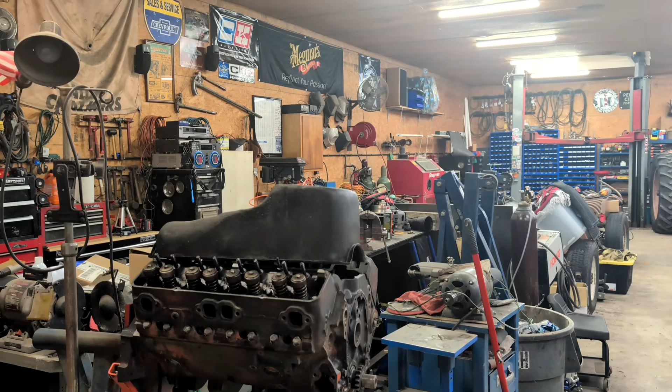Okay, so here we go. So I told you guys in the intro what I was wanting to do was get some of this place cleaned up. I've got messes everywhere. I've been cleaning up a little bit.

I cleaned up this workbench for the second time, and I was actually trying to get some shop projects out of the way to get some stuff cleaned up, because I was wanting to get that bench top right there cleaned off. I've got a rack that I was in the middle of building.

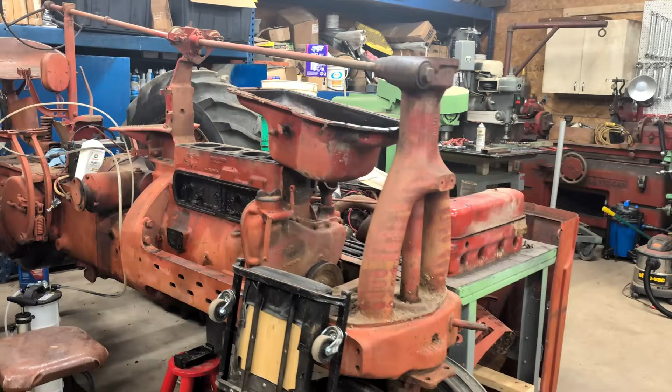But so here's what happened. I was cleaning some stuff up, and for one thing, I was wanting to get on this rat rod. But this M Farmall back here, late last spring, I decided that the engine was going to have to be rebuilt. I was wanting to do a video basically of pulling that, a pretty short video. But I'm trying to get stuff taken care of.

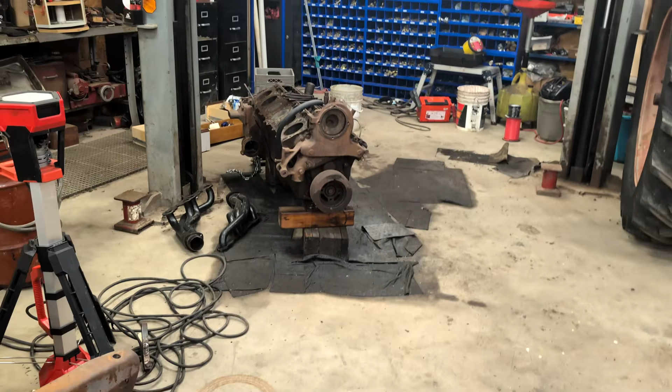But so under my lift right here, here's that one block for that V12, and this one's been partially torn down. And so I had a cart that I thought, well, I'm going to take a cart and mount this engine to it so I can just roll it around. Well, here's the one that is together.

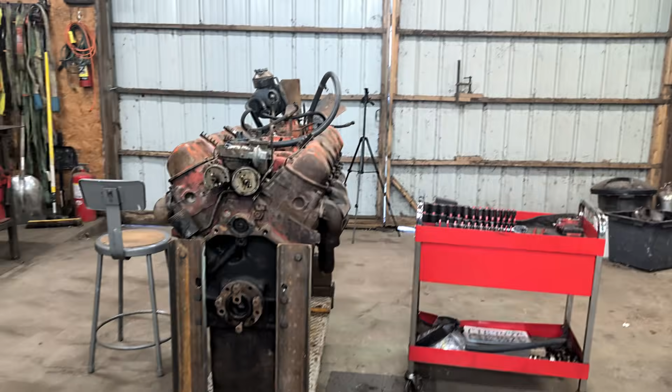But this is actually a bad block. And so I got this engine on this cart, and I seen that this thing was just so darn heavy and big. I thought, well, I better tear it partially down. Well, I just remembered I was going to do that on video. So here we go, I'm going to go ahead and tear this thing down.

Now, this is the engine that the block is no good. I think that I'm going to really try really hard, I'm going to turn this block into a cutaway, and maybe put it on a little trailer that I can take to shows.

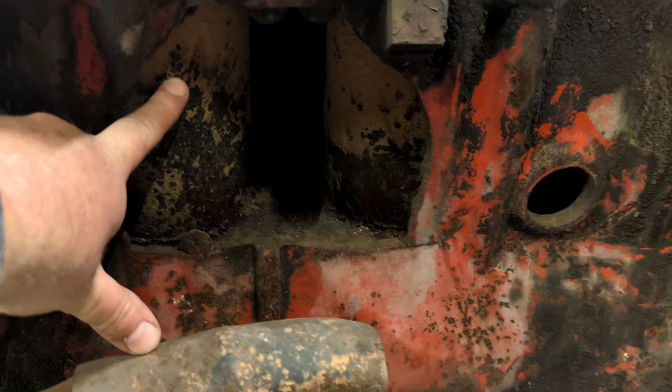Now I will show you here why this block's no good. See that big hole right there? There's the cylinders right there. And look right here, see that? That's actually the head, and I'm amazed that happened. And over here, see that crack in the head there? So I'm sure that this block was left outside with water throughout the coolant system.

And if you look right here, a freeze plug popped out of it. And then right there, there's another crack in the head. And over here, there's another crack in the head.

So with this thing being so big, I'm kind of needing to get it out of the way for right now, so I'm going to go ahead and start tearing this down. And I did want to document this. This is going to be a first for me. I have never torn down one of these V12s or an engine quite like this.

I'm not going to tell you guys a lot about the engine right now, because in this video I'm going to dig up some history and we're going to talk about this engine in depth, because there were many uses for this engine throughout the years, and I'm going to tell you how long it was made and so on. But with this walk around right now, let's go a little bit over the engine that I want to talk about.

Okay, so this is a 702 V12. And I'm going to talk more about this later, but they did call this a twin six, okay. But it is one solid casting, one solid block. It has one crank, it has one cam, but it does have four heads. See, two there and two on the other side, okay.

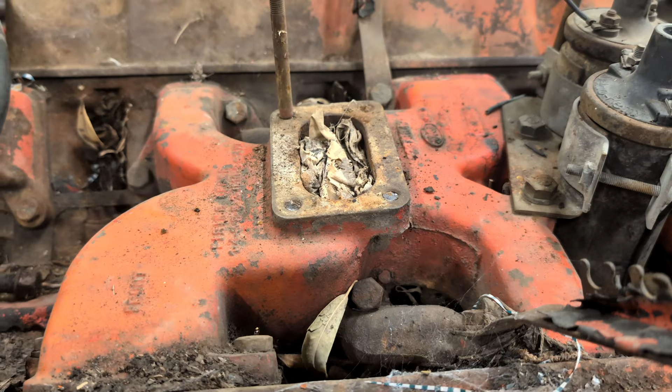It does have four manifolds. It is a V12, and it's got two separate intakes. See, there's the back intake and there's the front intake. Okay, and there's the cooling system. It does have two thermostats.

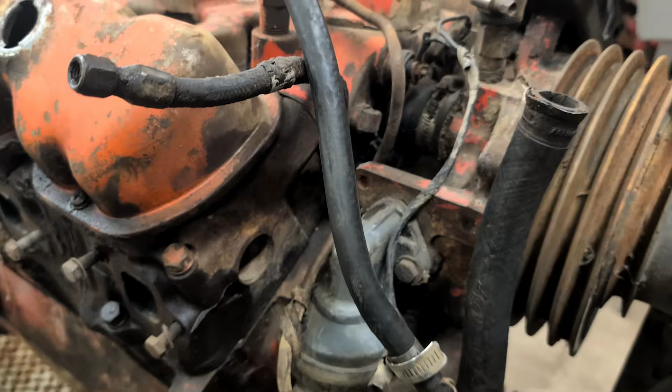Okay, there's a fuel pump, fan, pulley, water pumps behind that. See this pulley here? Now when we get that far, we are going to have to support that and pull that whole front cover off. But I think we're a ways from that.

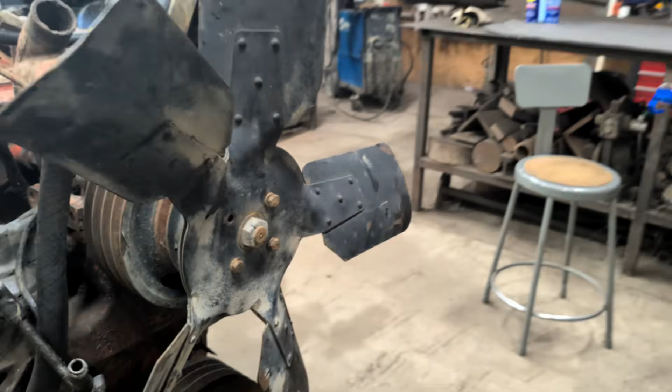And looking at this, I don't know if there is a spot for the cam in the back. But if you look back here, I don't know if you can pull the cam from that or not, but that is a drive gear for a cable-driven tach. Okay, now give me just a second and we'll go over to that other engine, because I think that other engine has a cable-driven tach on it. Okay, right there, if you see, that is actually a drive system for a cable-driven tach.

Now this engine here, this is the good block, but it's got some issues with the internals. As you can see, I think that this engine here probably ran a water pump and ran on propane. And if you look right here, see that burn hole in the top of the piston? But this is the one that's supposed to be a good block, but it's got bad internals.

So we will be tearing this one down later. I don't know if I will do this one on camera, but I am going to tear that other engine completely down on camera. If you look right there, that is the oil filter, so it's a big one. But so that's what I'm up to.

I'm going to get you guys on a stand, see if I can get you to where you can see. I may put you on time lapse in the beginning, because I'm going to take some stuff off that really doesn't matter, you know, like the valve covers and intake and stuff like that. But once I get some of that stuff off, we'll go over it and talk about it. Okay, but like I said, right there you can see it looking down in there. That is one cam, and we're going to pull it out of that other one. Okay, let's get you on the stand, we'll go over to that other engine, we'll start tearing it apart.

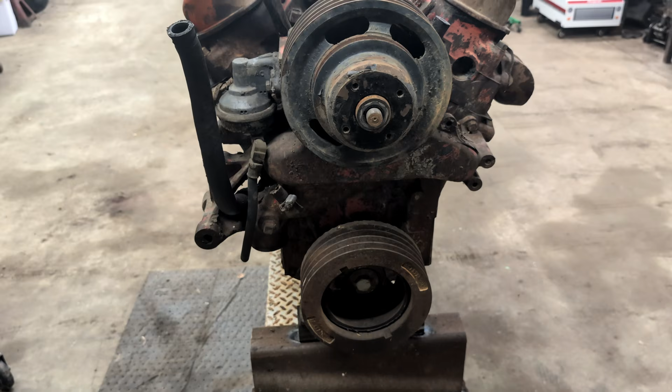And this endeavor is going to be something else. So I'm going to put you guys back on time lapse, and I'm going to take more of this apart.

So I've got the intake, distributor, valve covers off. I did take the power steering pump, fans, and such off too. So I'm going to take you over to the table before I go any further, and I'm going to show you what some of these parts look like. Then next, I'm going to start taking the heads off of this thing.

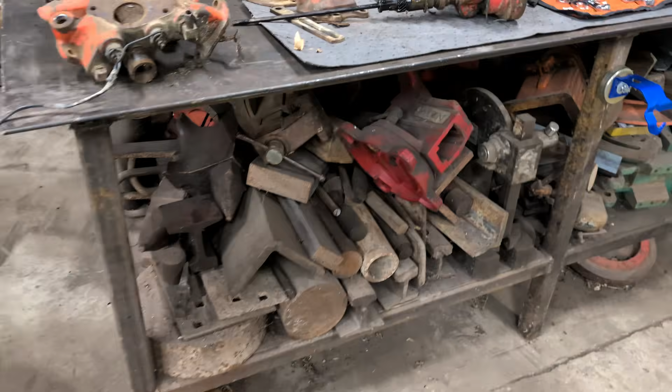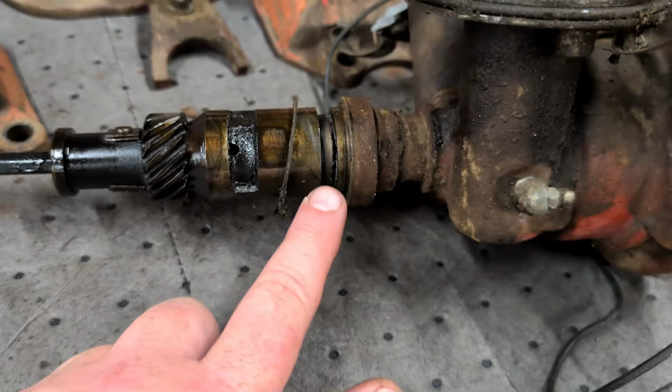Okay, so right here, that is the distributor. And I showed you earlier that it had two drives on it for the caps to put spark to your spark plug wires, and two sets of points. It's a little short, dude, but it's got a long oil drive on it. Look at that thing. After getting this distributor out, I don't think it's going to do me any good - if you look right here, it's cracked. I do have another distributor, so that'll help.

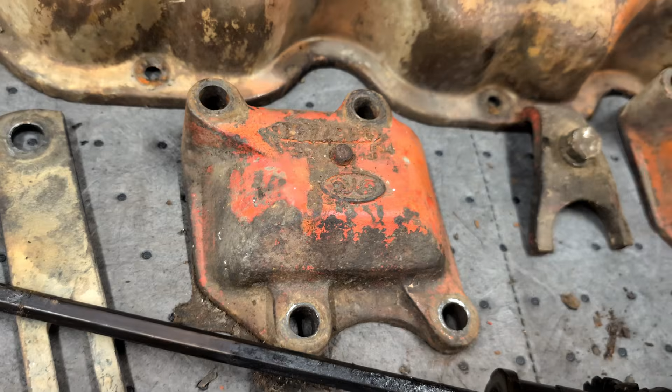Okay, these were some caps that were on the heads. I think that was to keep from having a crossover in between the two intakes. And there's a valve cover, which is not much - they look just like what's on the V6s.

Okay, here is a thermostat housing, and I thought that was a double, but it's actually a triple. Look right here, triple thermostats in this thing. And look here, here's the sensors - look at all the sensors. They got two sets of sensors. So yeah, triple thermostats.

Okay, here's one of the intakes, and they're just like what's on the V6s. And then come over here, that's upside down, but that's the exhaust manifold. Man, I tell you what, those are probably, well, they're 60 plus years old, and they are heavy, heavy, heavy duty. Look how long they've lasted. I think they're the exact same as what's on the V6s.

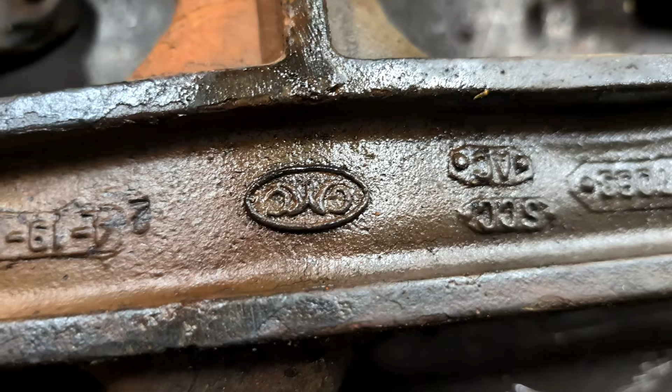But I will tell you something else - if you look right there, almost every single one of these parts has got that GMC logo on them. They were kind of proud back in the day, like Ford used to - Ford used to stamp Ford on everything. Everything I found has GMC on it. So there's another valve cover, and there's a power steering pump, and there's a fan. So that's what I've got taken off so far.

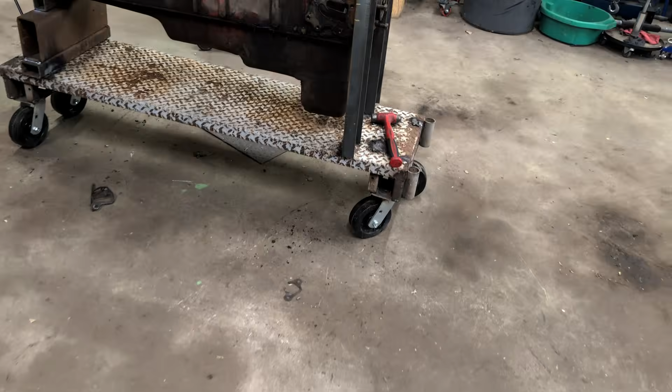I'm going to take you over here once again to show you down inside the valley. There is a cover right there, but I think I'll wait to take that off after I get the heads off.

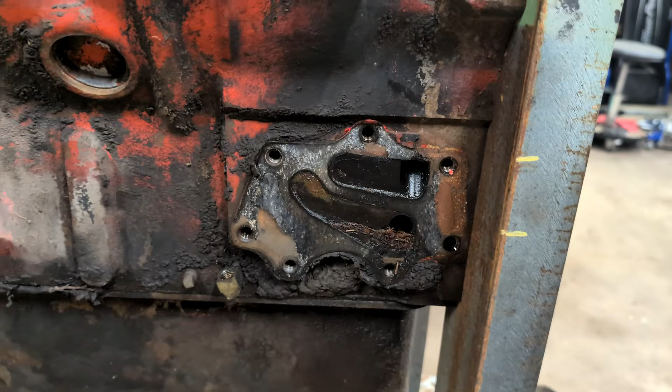Right there is where the housing goes for the oil filter, so the oil filter housing goes right there. That's what I'm going to do next - I'm going to take the heads off of this. I'll take the rocker shafts off, get the push rods out, and then take the heads off. But this setup is pretty much just like what the V6s are, pretty much the same, just an old school rocker setup.

Okay, so here in just a bit, we'll get these heads off. Okay, now, got one more right here. Two more.

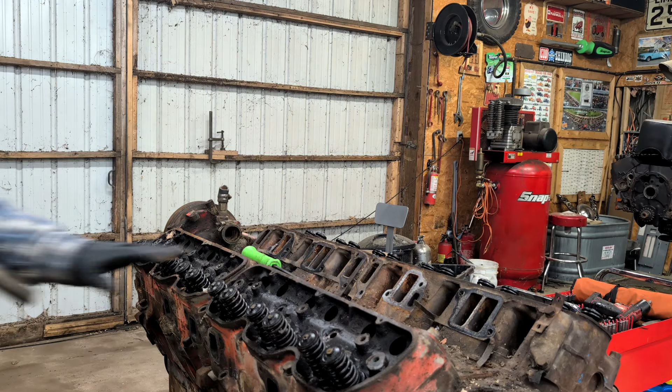All right, let's see what we got here. Let's see, got here, there. Got all on the inside, all there. All right, we should be good to go. Let's see what happens here. Oop, that one's gonna come off pretty easy, I think. Oh, these are heavy. Okay, there we go.

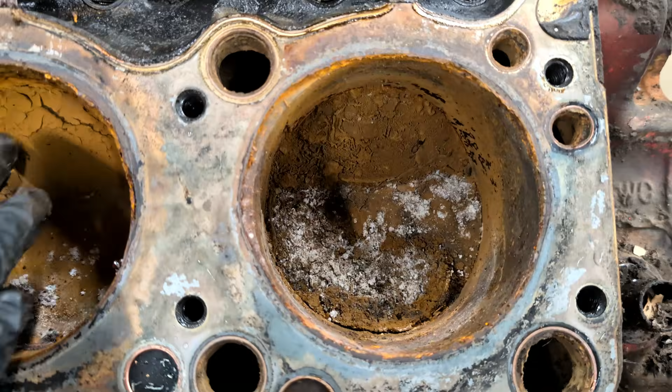Woo-wee! Look in there. All right, I'm gonna have to stop you guys for a minute so you guys can see this. Get you off the stand. Hang on here. All right. Ooh, man, look, these have been sitting for a while. Look at all the rust in there. Man, I'm glad this is the block that's no good, because this is no good.

Now, it's supposed to have good internals. I think pistons you could probably still get for these. I think you can still get quite a few parts from Thunder V12 if they're still in business. But look at that. I'm going to vacuum that out real quick before I make any more of a mess.

As you can see right there, there's the lifters, and look down in there. There's the cam, but I'll get you a better look of it later. But there's the lifters.

But there's the first head off of this block. And man, oh man, look at that. Wow. This thing's been sitting around for a while. But you know what, even looking at that, I think that piston may be all right.

Okay, all right, let's get the rest of these heads off. Okay, so I wanted to show you the inside of these cylinders.

This side looked kind of like that, but it cleaned up pretty decent. And these ones that are actually full of all this goo are actually looking pretty decent. And that one there, I think I'll be able to get that out. And that one, I think that these pistons may be fine.

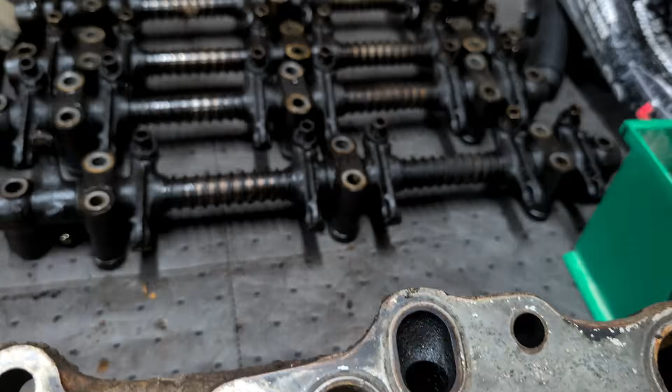So there's your combustion chamber. Here's your valve train - look at the size of them valves. Okay, and then there's your rocker assemblies.

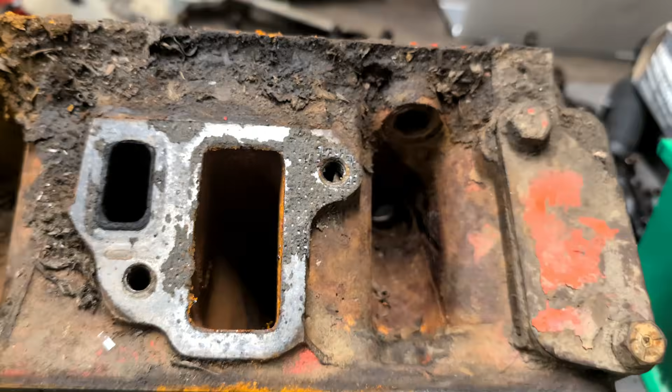Okay, so oh, hang on, I turned this one the wrong way. Okay, as you can see, there's your spark plug hole right there. And that's the top side of the head. So that is the one major thing different about these Super Vs - the V6, the V8, and the V12.

And yes, they did make a V8 version of it. I have one, I have one in my 1969 fire truck I call Smokey. But that's it.

All right, so I'm going to work on getting the balance wheel off and see if I've got a puller that will pull it. But that's what I'm up to next. So let me get you guys back on the stand.

Okay, so I got pretty much just a standard balance wheel puller on there, and I'm getting ready to try to see if that's going to work. Now, those bolts just go through there. I couldn't get it lined up to where I could use 3 of them, but I've got 2 of them there. I don't know what pattern it is, just didn't seem to work right. But let's see what happens.

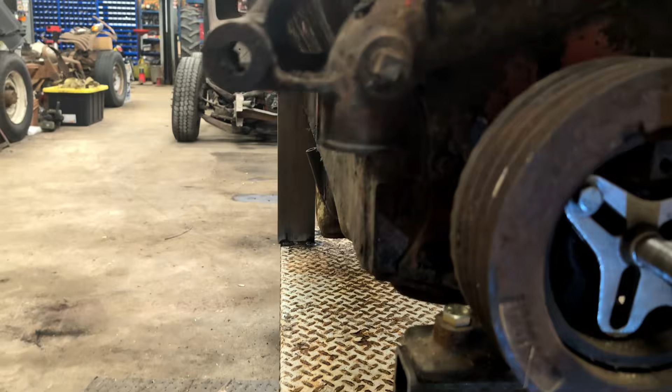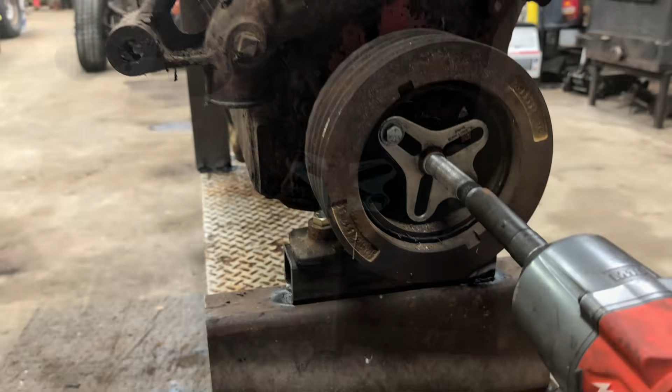Okay, here we go. All right. Let me get some oil. Hold on, all right, I've got a can of WD here. I want to put some on these threads. And if I need to, I can get the mini ductor out. Let's see, hopefully this is going to work. All right, you guys ready?

Whew. Boy, that's a long-winded sucker.

I hope I don't have to go much more because the shaft on this balance wheel puller isn't real good towards this end. I used it to take the balance wheel off a John Deere engine on a combine a couple years ago, and man, I had to really torque it good to get it off. So let's see if we're almost there.

My gosh, I ain't got much more thread left. It's almost off of there.

Okay, hang on just a second here. All right, give me just a second. All right, I tightened them bolts up just a little bit.

And by golly, I think that thing's just gonna come right off. Let me get you back on the stand and I'll just see if I can pull it off of there.

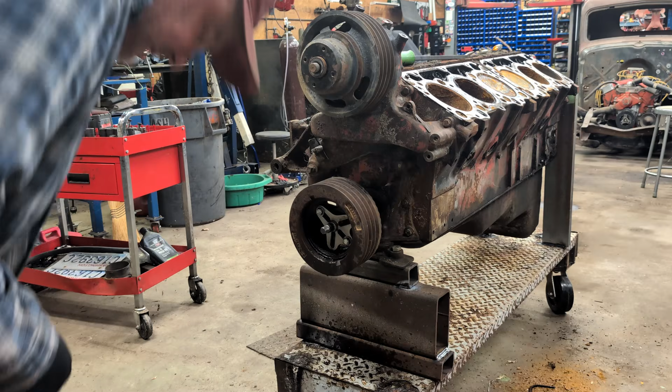But it's going. All right, I think I got it. I think I can just pull it right off. See what happens here. Oh, there it is. Okay.

Now let's get this piece on the bench.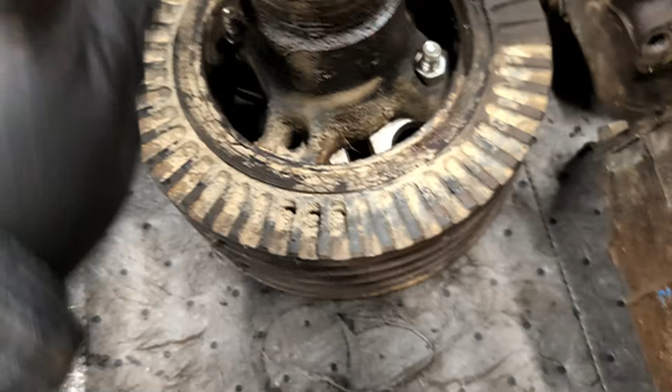Okay, so here's the balancer pulley. It is a balancer, as you can see. Look here on the back, see all that? That's for the timing. There's a pointer on the front cover, let me show you. As you see right there, there's a timing pointer.

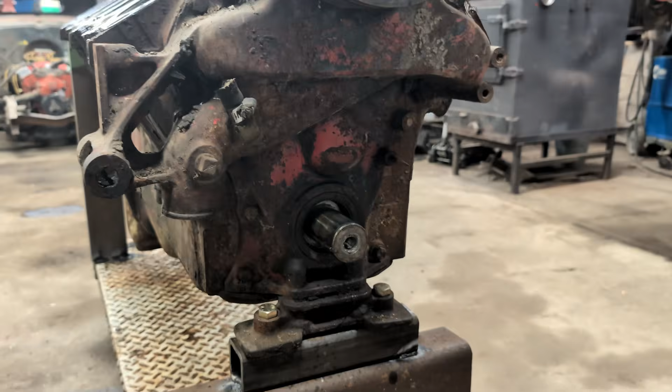All right, well now I need to find some way to hold up - which I think I may just get my cherry picker - but I got to find some way to hold up the front of this engine so I can take that front cover off.

Let's see what we're going to get into. I'm hoping before I quit for the night I get as far as getting the cam pulled out of this thing, so let's see where we get. But right now I got to figure out how I'm going to support that, because that front cover is actually the front mount too. It's how I've got it sitting on this cart.

So I think I'm just going to get my cherry picker and straddle it, put the arm out and just support the front of it and get this front cover off. Okay, stay tuned. All right, so there's my cherry picker, I'm getting ready to hook it up.

After looking at it, I want to take these covers off right here, which I'd kind of call a valley, but I want to go ahead and take them off because I'm going to be holding this up with the cherry picker for a little bit until I get that front cover off and figure out how I'm going to hold the front of that engine again. I'm going to take these covers off, get my cherry picker hooked up, then get you guys on a stand and take the front cover off.

Okay, so I decided to go ahead and take that pulley off of there. This water pump's tapered, so that's how it was held on, and a tapered fit is a really tight fit. I did get it off with just a regular gear puller, and it came off all right. Once I got it off, I saw that the hub's bolt holes were threaded where the fan was on, and I thought maybe it'd be a stub like a regular small block Chevy or anything like that, but it wasn't - it's got this tapered shaft on it.

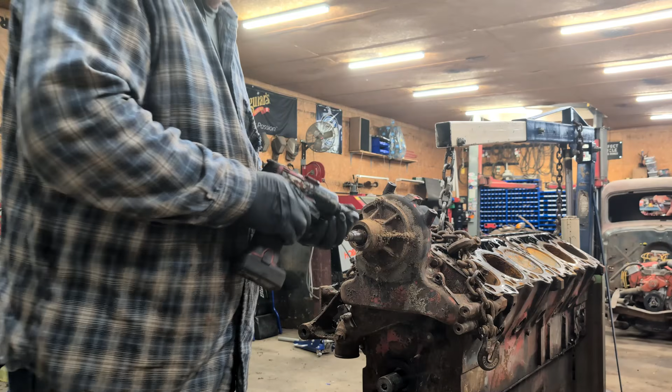Every single one of these is going to hang up on me, so I'm going to put you guys on time lapse for a minute. All right, I got the bolts out. Let's see how much it fights us.

All right, well, there it is. Man, none of this looks really that bad. I'm kind of surprised. I just changed the water pump in Jimmy Hoffa before I went to Greaserama, and I'll tell you, this one's not much bigger. I had heard they've got some issues with these things overheating, and looking at this pump, I know Hoffa's got a heck of a pump on it, but you'd think this one would have a little bigger pump. I mean, this is twice the engine. It is a little bigger, but not a lot. I'm kind of surprised.

All right, so let me get this jacked up, and I'll bring it back in a little bit to take the front cover off.

All right, so I've got that sitting off of there. I think, yep, right there. I think all I got left is these bottom two. Okay, I got one there. I got it out. Oh, there's another one right there. Okay, that one's a stud. Already got it out. Got everything out up there.

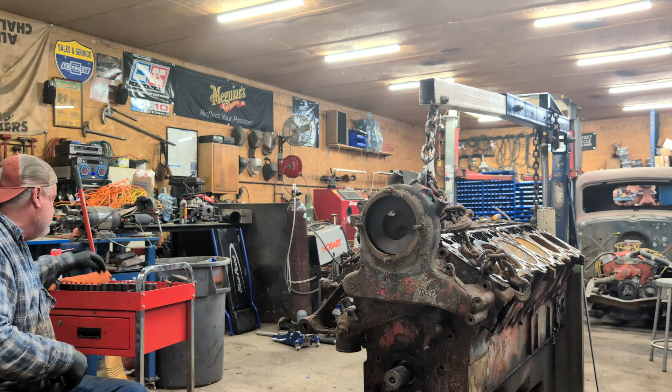Okay, all right, so I think that's it. See what happens. You guys still on? Let me look. Yep, you're on. Okay, there we go. Here it comes.

Looks like I got two underneath there. I think I should have thought about that. That's attached to the whole pan. All right, so I got that. I had to get a universal and a 1/4 inch socket to get that third bolt. So let's see what happens now. Oh yeah, look at there. Oh baby, yeah. Okay, let me put this down. I'm gonna take both hands.

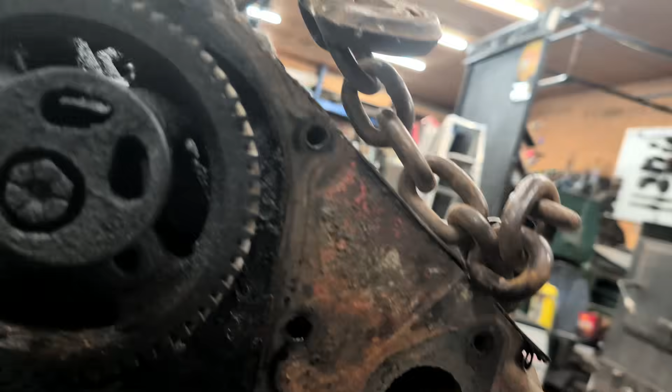So now let's take a look at the front gearing on this thing. Oh, look at this, nice heavy stuff, look at that. And there was your fuel pump eccentric. Yep, that's what drove the fuel pump. This right here, this would be your timing gear. This would be an idler gear between them. And there's your crank.

All right, now let me see if I can get ready to pull that cam. Looks like it's got a cam plate on it. I can see it right here. Yep, hopefully it's just 2 bolts, hopefully I can get to that. I want to try to leave that gear on there, that'll give me something to pull on, because that thing's going to be a mile long. I mean that thing's about 4 foot long. I may even need to make a spot on the table for it. But let me get ready, and I'll try to get this cam pulled tonight. It's starting to get a little late. So let me see if I can get this cam pulled.

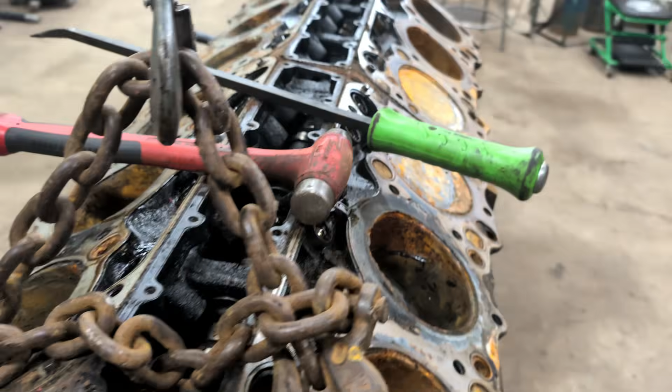All right, so I think I got it figured out. I went ahead and took that eccentric off of there for the fuel pump. And there's the cam, and I think I got the lifters, I think I got them all up. Some of them are falling back down. But I think I'm ready to start pulling it. Let me get you guys back on the stand.

All right, let me see if there's any of these lifters that are falling back down. Yeah, there's 2 of them, here's one. Another one. I'm gonna come over here and see if I can pull them out. I pulled one out earlier. They're coming out pretty good. I may just go ahead and take these all out.

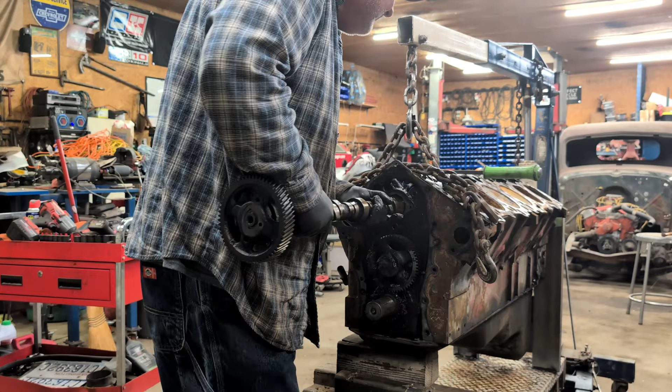Here it comes. We're just about there. Oh, there it is. One camshaft out of a 702 V12. Ah, look at that thing.

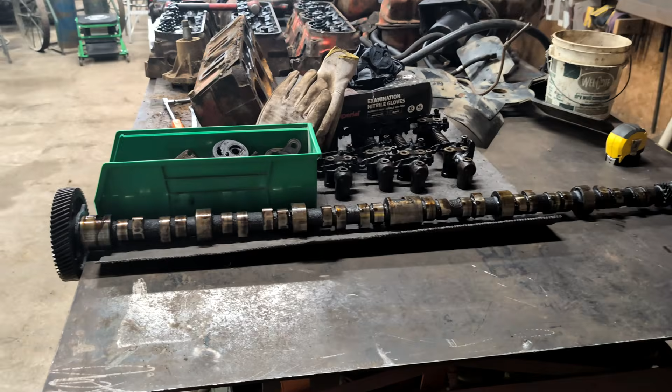Wow, that's something else. All right, let me get it over on the bench. All right, there it is. That's one camshaft out of a 702 V12.

That's pretty cool, pretty massive. I'm gonna put a tape on it and see how long that thing is. Give me a minute, I'll put you on a little tripod here on a table. Okay, there you guys are. I'm having a heck of a time getting that all in frame. So let's see how long this thing is.

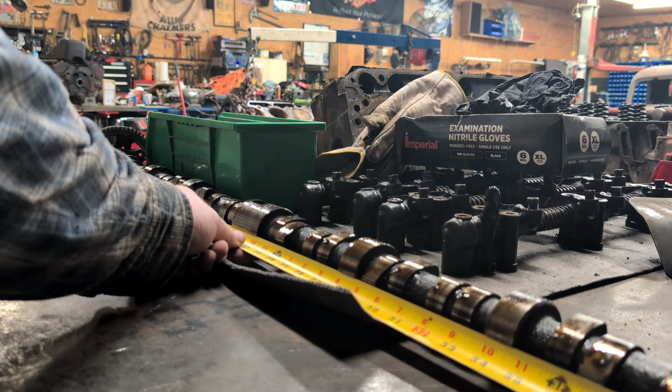Okay, that's right to the cam plate. So it is 42 3/4 of an inch. We probably better call it 5/8 to be exact, but that's what it is, 42 5/8 to here. Now out to the nub there, it's probably about 43 1/4, and that is the tach gear right on the end of it.

But looking at it, it don't look terrible. So far it's looking like these guts are probably going to be okay. The heads, don't get me wrong, I think the heads could be salvageable. I could weld the cracks and have them tested, and I could probably still make do with them. But I've got a whole other set of heads, a pair of heads for a V6, and I'm not sure what V6 they were out of, so I'm going to look into that.

But I think that's going to do it for tonight, because the next thing I got to do is get that off of that little cart. Let me take you over there. I need to get this block off this little cart. Now let me tell you something.

So before I started all this, I was wanting to build a real heavy-duty engine stand to be able to rotate all this stuff. I think I'll probably do that with that other block that's over there. I may just put it on this and tear it down basically the same, leaving the block on that cart for now, and then work on building the big engine stand later when I'm ready to start to assemble this or whatever we're going to do with it.

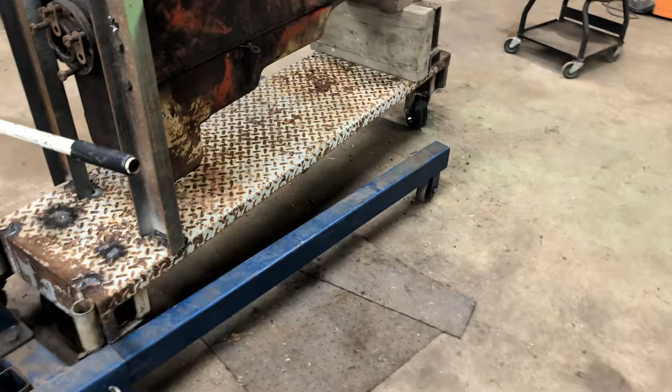But I think that I'm going to call it a night, and I've got to work tomorrow. So if I can get out here after work tomorrow, I may unbolt this block and just turn it over here, right on the floor, and take the pan off of it and see if I can get the crank out of it. But that's where we are. I think I'll probably see you guys tomorrow afternoon after work.

And don't forget, in this video I'm going to have some data information, and we're going to do a little tidbit on some history of these engines. So this is going to be informational about these engines too, not just tearing it down. But that's where we're at.

As you can see right in there, that's where the cam was at. Now those lifters are moving okay. Some of them are a little stiff, but they're coming out. Some of them I just pulled out with my hand, but they're all coming out. So that part's good.

So far I'm not terribly concerned. I mean, if I was having to use that cylinder bore, it'd be screwed. But the piston itself does not look too bad. I think they'll clean up. So I got my fingers crossed. I'm hoping we're going to be able to build an engine.

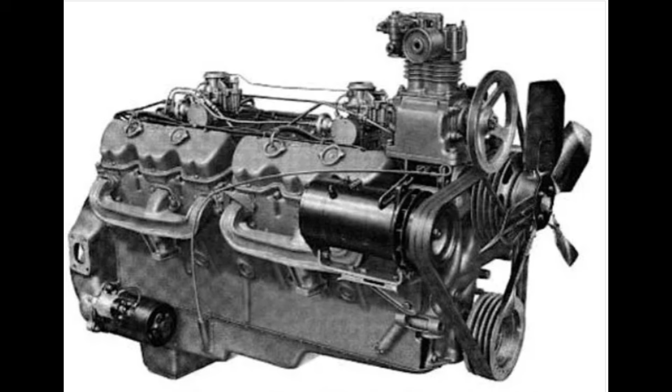This 702 V12 has a relatively slow operating speed of only 2,400 RPM, at 275 horsepower. So that was its peak, and they're very low revving engines. They are what they called a twin six design, and they are a 60-degree V, so the spark plugs are inboard. They're actually on the top side of the heads of these engines. Very, very unique engines - there's not a lot of them left. Very, very reliable engines. They lasted for a very, very long time.

So I'm going to show you guys some examples of these, and a couple rigs that they're in. So yeah, this is what we're talking about. Then I'm going to show you some more specs as far as the engine itself. It says the engine's capable of pumping 17 gallons of oil per minute, and it is also capable of pumping 118 gallons of water a minute. That's nuts.

So that's what we've got, and I'm going to show you some more stuff here. I'm going to show you some specs, and we'll talk more about that.

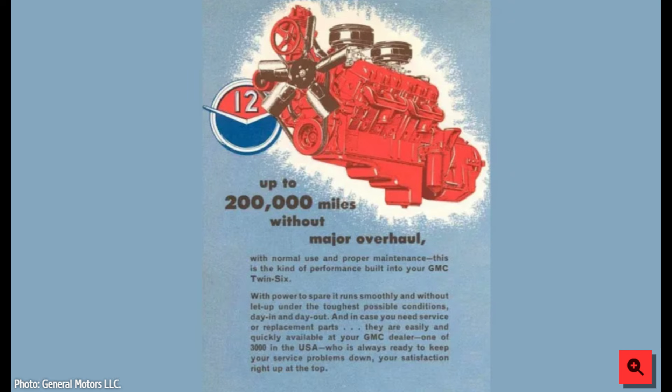Okay, as I mentioned before, these were very long lasting engines. As you can look in this advertisement, this is an old advertisement from many years ago, and 200,000 miles back in the early 60s, that was something else. These engines were made from 1960 to 1965, and 200,000 miles on an engine was great. But there's some of these known to have a heck of a lot more - some known to have several 100,000 hours and even over 1 million miles. So these were very good lasting engines.

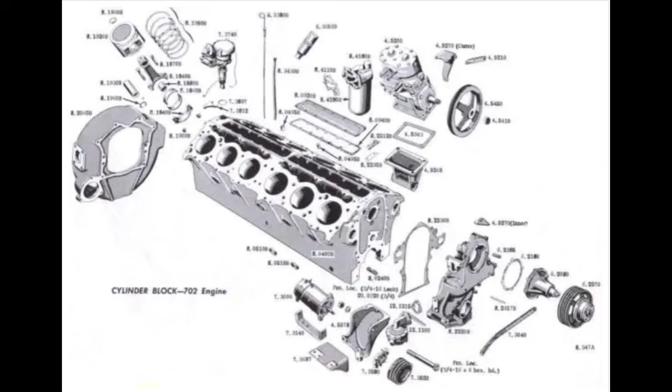Okay, here in this picture, it's just a breakdown of these engines, showing the components of them. There's nothing really much here that we haven't already talked about. This is just a breakdown from General Motors.

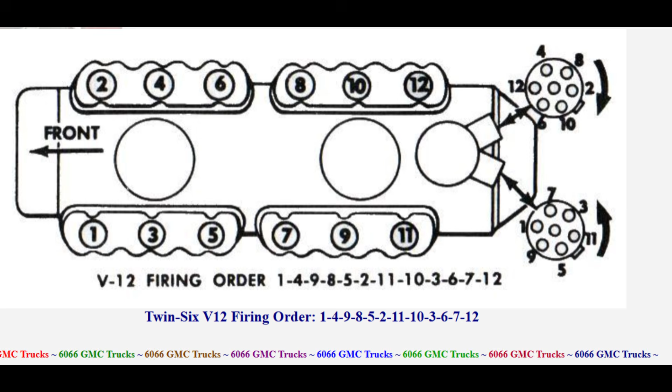Okay, now this clip I got from the 60 to 66 GMC guy, and as you can see, this is the firing order. You can see it's got, like I said, one distributor, it's got two distributor caps - one runs one side, one bank, and then the other runs the other bank, and they turn in opposite directions. And also the firing order - so when these are firing, they're basically firing at the same time on opposite sides, because it was such a mass that you would have to have a fire on each side to get that all that mass kicked over. Very, very, very unique engine.

The compression ratio is 7.50 to 1. The notes, I don't know what the notes are in that. If I find that, I'll get back with you.

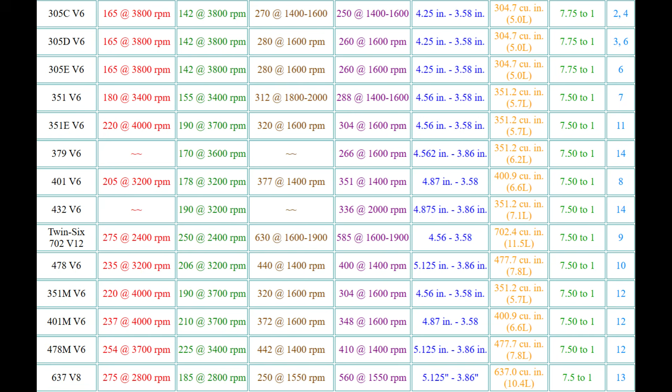So what I found on that Note 9 is just the models that V12 came in as a GMC truck would be a B, BW, an L, and an LW, and 7000 series. So I'm going to show you a picture next, two examples of what those V12s were put in.

Couple squirts, ignition, contact.

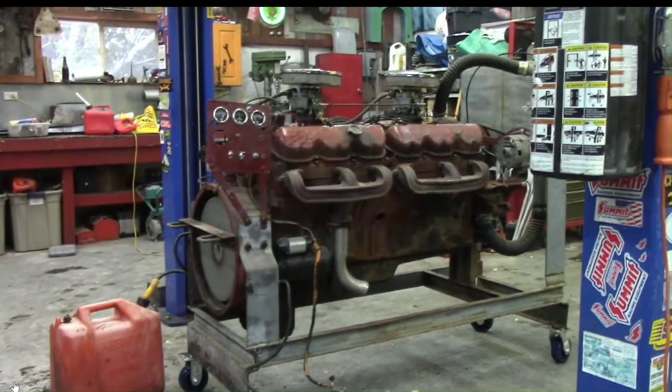Got one broken exhaust, but I got a bunch of them.

Man, that just makes my heart do flip-flops.

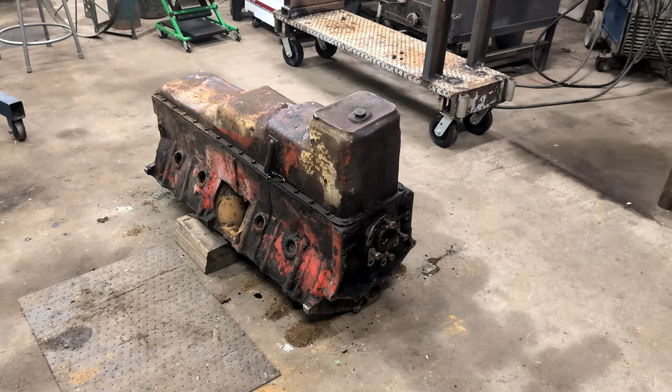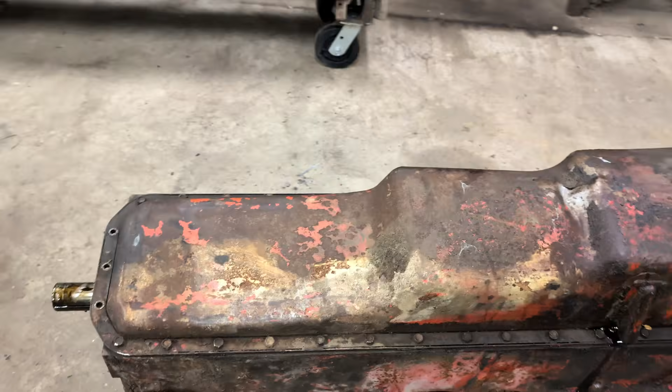All right, so we're back. And I got this engine on the floor. I got it turned around. I got it sitting right on the floor. And as you can see, right there's the oil pan. Look how long the oil pan is. So I'm going to go ahead and get the oil pan off. And then let's get a good look at everything.

So I'll put you guys on a stand. I'll probably time-lapse taking this oil pan off. You guys don't want to see all that. There ain't nothing to that, it's just some bolts. But we'll get the oil pan off, and then we'll see what we got, and then we'll talk some more.

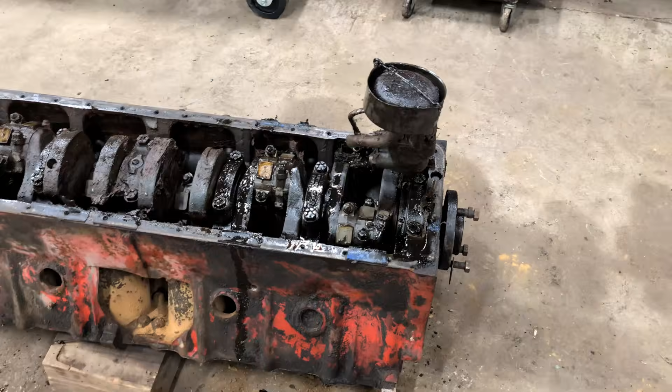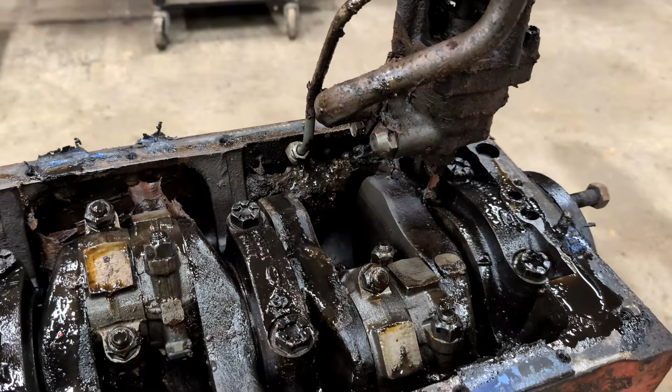All right, so we got the oil pan off. So there it is. Yeah, a great big oil pump. I think that's probably the first thing I'm going to take off. And then I think I'll take the caps off of the rods.

Everything's seized up, so there's not going to be no turn on anything. I'm basically going to have to just try to get down in there and take off everything right where it's at. Because all the pistons are going to have to come down through the bottom. Remember, we got this upside down, so.

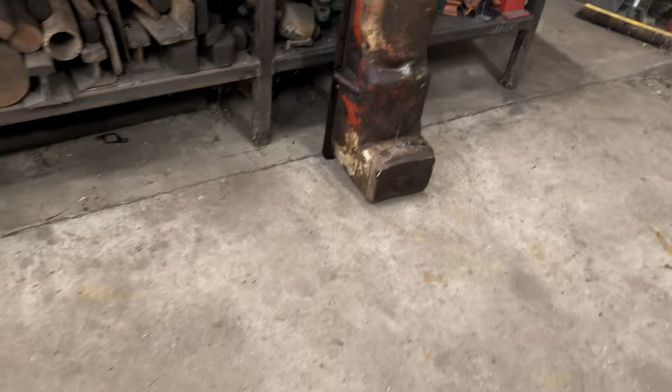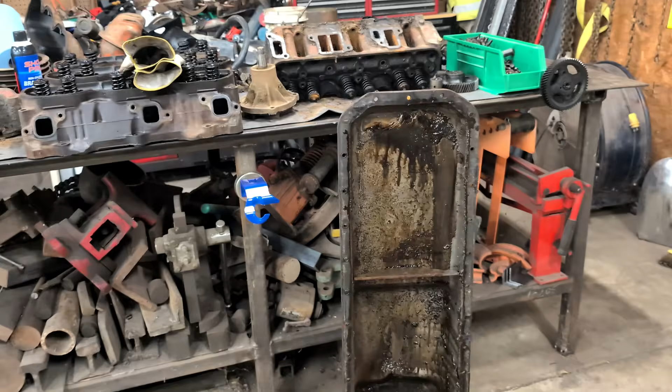Yeah, it's just a little taller than that bench. But I'm going to go ahead and I think I want to get the oil pump off of there. It looks like that one line and those two bolts right there.

Huh. Interesting. I'm not really sure. We may have to revisit the distributor after I get the oil pump off. Because I'm not real sure if that long rod was what drove the oil pump. I don't think it is. But there it is, here's a good look of it.

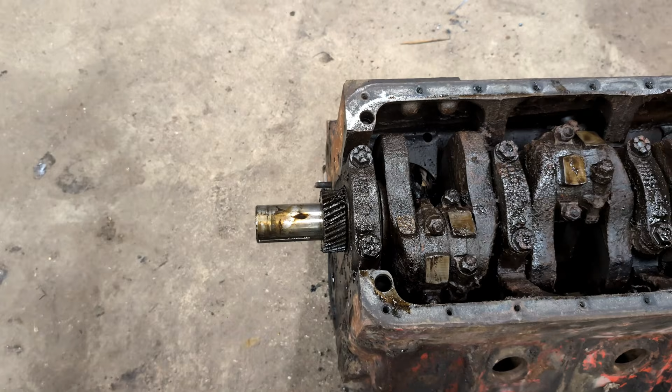So, like I said, I think I'm going to take the oil pump off first. And then I'm going to take the connecting rods. As far as the connecting rods go, I'm going to lay them over on that corner of the bench and lay them out like they're in the engine, so I don't have to stamp them right now. I'll probably mark them with a paint pen, but I'll lay them down there as they're in the engine. I don't think that's really going to matter if we get all this rebuilt, because the pistons will match up to the hole, however the cylinder holes are machined. Now the crank caps, yeah, we need to make sure them are all where they belong. But that's what I'm going to do now.

So I hate to do it, but let me get you back on a stand again, and let's get this oil pump off there.

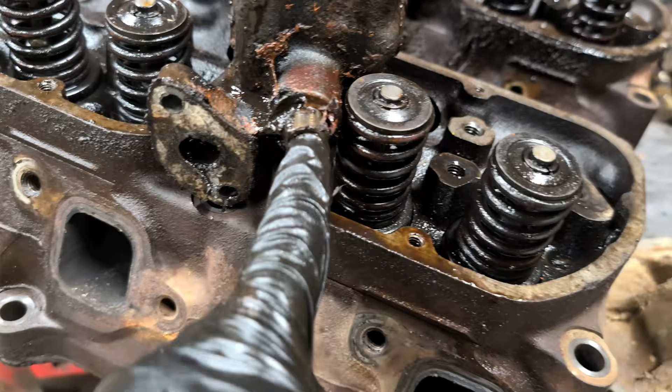So there's one oil pump out of a 702 V12. All right, let me get some caps going.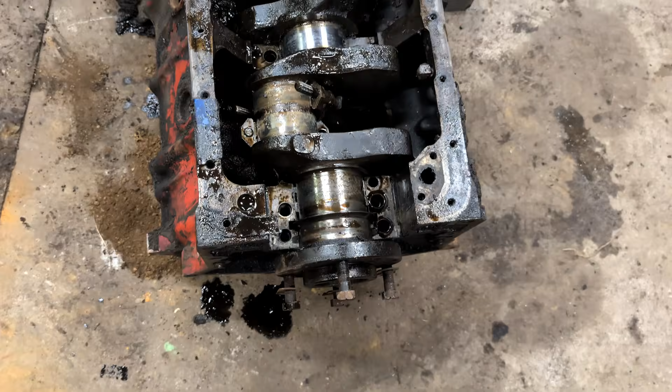All right, so I've got all the caps off of it, all of the main caps. That was a big one there, and all the rod caps. Look at this one in the middle. It's only got a bearing right there in the center of it, and the cap was all across there. There wasn't two caps.

So there's the crank. Overall, so far, I don't think this looks terrible, but I'll take you over to the bench and show you the caps. That cap on the back was a big one.

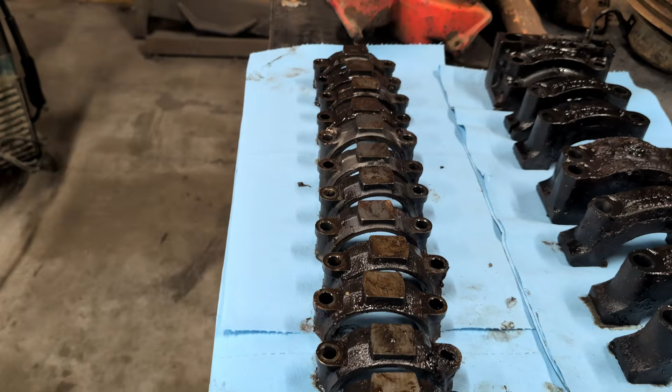Okay, so here we are on the bench. There's all the rod caps. I've got them all in line, and I've looked at every one of these. I know it's got some oil in it, but give me just a second. Okay, so I got two of them here turned over and cleaned up, and man, they don't look bad at all. Look at that. They do not look too bad.

Now you can tell where these main caps have been setting, but they're not scored or anything like that. You can see where they've been sitting. And there's that center one I was telling you guys about. See how wide it is, basically a double cap.

Okay, let me turn it around. There, see how it's got a bearing right there just in the middle? Just like it showed on the crank. Pretty cool. But there they are.

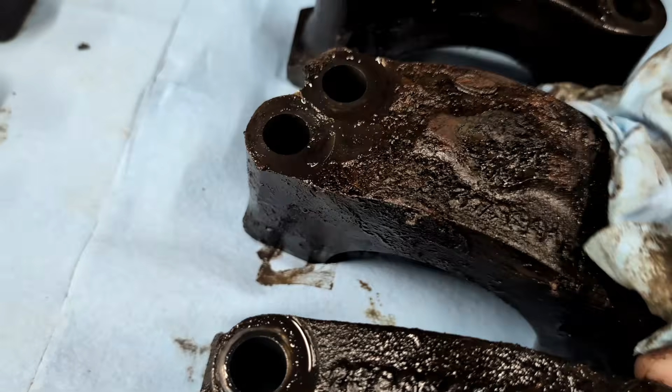There's the rod caps and the crank caps for a 702, a GMC 702 V12. I keep forgetting to mention, this is a GMC engine. So this V12 was made by GMC, which, like I said, by this part of the video I'm sure I'll put that in the middle. This is almost the end.

So we've already talked about the GMC and this 702 V12, what it came in and what it was used for. But let me get ready to pull the crank.

All right, so far I haven't tried to push any of the pistons down. I don't think I'm going to be able to anyway. But I got it hooked to each end of the crank. Hopefully it lifts it up out of there. Now, I think if I remember right, and like I said towards the end of the video, and in the middle of the video which you guys have already seen, you know what this crank weighs. I think it's about 170 pounds.

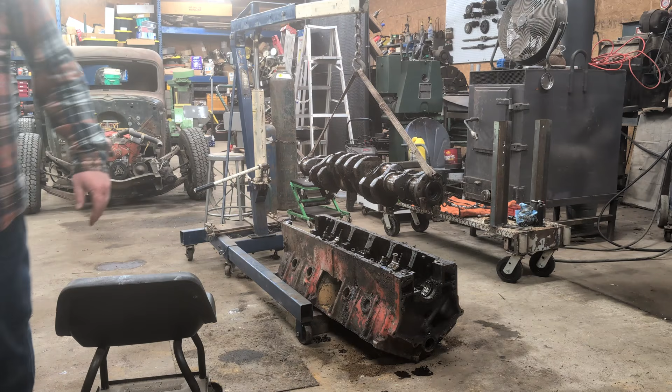Come on, there it comes. Look at that, that's the crank. Let me get you over here, we'll get a little better look. You know what, I think I'll stop it right here for a minute. I'll get this thing set on the bench over there and we'll look at it. All right, give me just a minute.

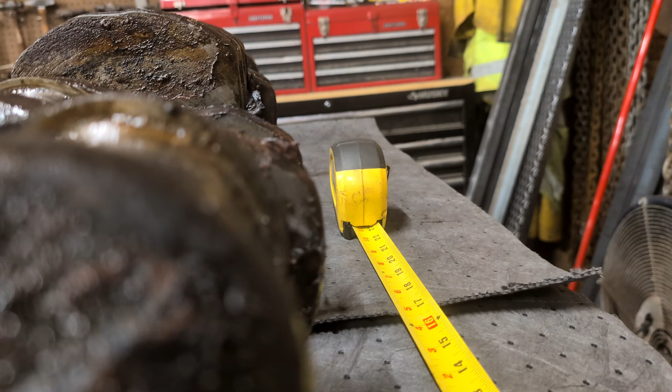All right, I've got you guys right down on the end of the tape, so hold it good, make sure you don't move the tape. All right, so the crank, from the end of the stub where the balancer is to the flange, is just about right at 49 inches. So it is 4 feet 1 inch. This crank is.

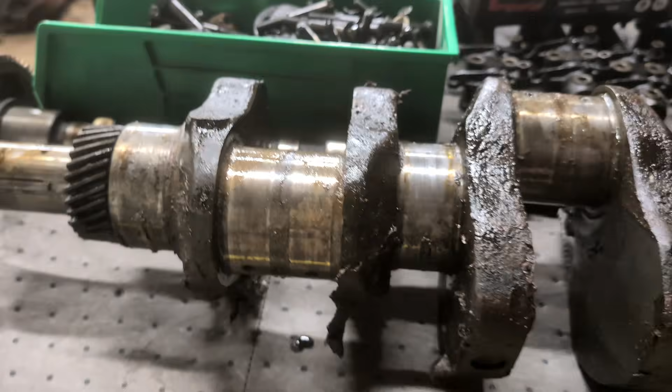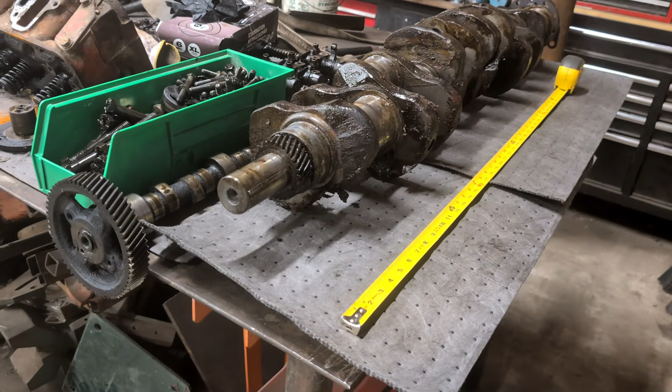So I think I'm happy about this crank, this crank's good. The pistons I'm a little concerned about, I'm just not real sure how that's going to go. I may try one or two of them and we'll see what we get, but I may have to soak them pretty good. Let me get that engine block turned back over and we'll go from there.

All right, I did get one of those out and I didn't get it off my camera, but it actually came out pretty easy. This is a solid piece of bar that I've got in here on this one. This is a hammer I used over here on that side. Well, I'm going to try the green weenie here. I got this one to move a little bit, so let me see.

There went the bearings. Just want to make sure I'm not marring stuff up too bad. Okay, look down in there. It's gone a little bit. Let me try this one over here, so you guys can see me get one of these out.

Now that one's pretty high up in the hole. I don't know if I'll be able to get that.

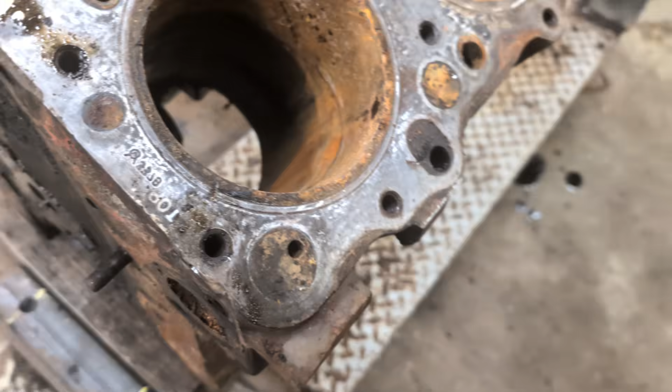Now here's the whole one I got out. Look at the size of that bore. That's the one I was working on, and it went just a little bit, but I don't want to mess up them pistons, so I'm gonna let these soak. This one here, actually two, right on top, boy, I'm not sure about them at all. There's another one, there's another one. But here we go, so this is the piston that I took out, which is just basically an overgrown version of any regular piston. It's good size.

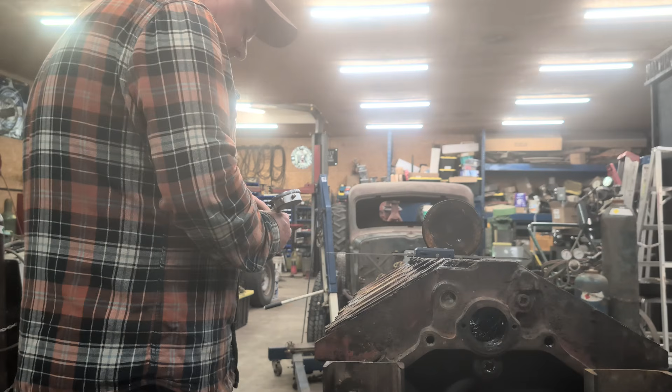You know what, give me just a minute and I'll get something and we'll measure the bore on this thing. Hang on, okay, so I've got my cylinder bore gauge here. Four and a half, five, six, six, not quite seven thousandths. But that bore's rough.

And I put my calipers on the piston here. I'm getting 4.563. So that's it for that.

Let me stop right now because I think I'm going to end this one. I'm going to soak the rest of these pistons down, let them sit for a while, and then I'll work on getting them out. I may do a short showing me getting the rest of them out, but I got a piston out so you guys can see it. This thing is tore down, the pistons are left in there, but as you can see, they need to be soaked really good. I need to soak on them a little bit so I can get these on out of here. So yeah, I'm going to end this one right here.